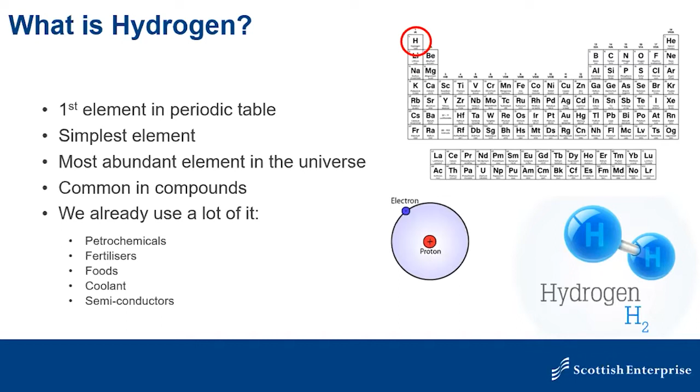So what is hydrogen? Here you have a bit of background information: it's the first element in the periodic table. Hydrogen exists in abundance in the sun, but is hardly present at all in our atmosphere, so it has to be made from molecules that contain it, such as water and organic compounds.

How do you produce it? Well, there's various different ways and all different kinds of colors. I'm only going to talk about blue and green hydrogen because they're the ones that the Scottish Government is supporting. Steam methane reforming is the way we make blue hydrogen. It's a method of producing hydrogen from natural gas, which is mostly methane, and it's currently the cheapest source of industrial hydrogen. Green hydrogen is made through electrolysis, using electricity to split water into hydrogen and oxygen.

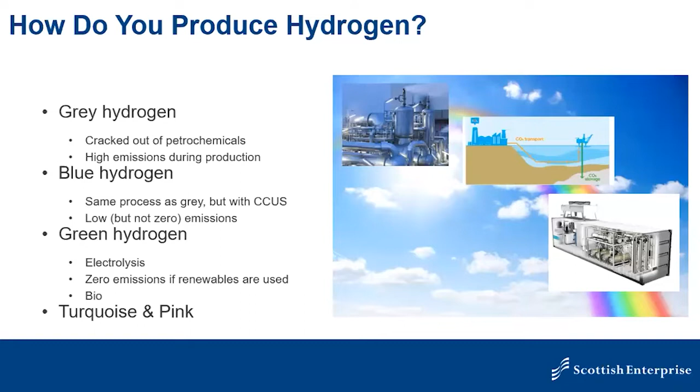Scotland has the potential to produce industrial scale quantities, firstly of blue hydrogen via steam methane reforming, and then green hydrogen from our offshore and onshore wind and other renewables.

So why hydrogen? Well, I think you're all aware that Scotland has really stretching climate change targets. We need to act rapidly and at scale in an unprecedented way across our innovation, across our investment, across regulation to make this happen. The Scottish Government is also committed to not leaving anybody behind, so is applying a just transition approach to this, and we see it as a really big economic opportunity.

We think that hydrogen can help, and the reason for this - I'm going to show very briefly on my next slide - is that it has so many different ways of being used. It has high energy content by mass. It's very flexible and can be applied to heat in domestic, commercial, industrial cases, and transport and power. And it's also zero emissions at the point of delivery.

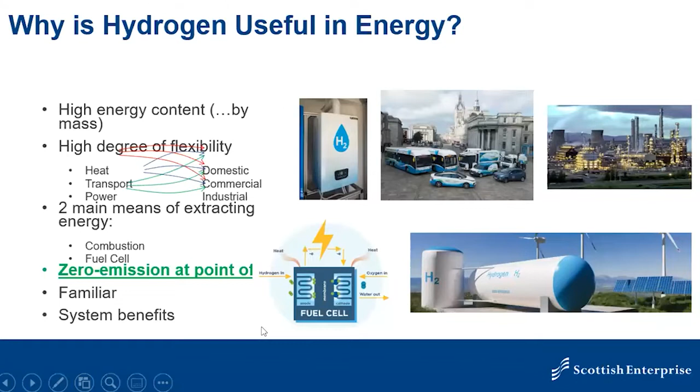It's familiar because it can be used in a very similar way to the way gas can be used within the heating system, and there are system-wide benefits that don't always get picked up in cost comparisons. So why Scotland? Well, past projects, I'll talk about those in a minute.

Natural resources we have in abundance: wind, wave and tidal. Infrastructure legacy of the oil and gas industry, our pipes and storage space. And our innovation—we have centres of excellence across the country.

Supply chain, just as I said, we have the infrastructure legacy from oil and gas. We also have a strong engineering tradition, and we have plentiful supply chain opportunities that could be transferred from the oil and gas sector into this one.

Through our analysis we've looked at export, and we think this can be a major economic development opportunity for Scotland, creating between 70 and 300,000 jobs by 2045, depending on the degree of intervention and how far we go down the hydrogen route—from incremental change to perhaps exporting on a vast scale.

And we have a project pipeline—there are a lot of projects around Scotland. Historically, these are the projects that really have put Scotland on the hydrogen map internationally. Without these projects, many of them very first-of-a-kind demonstrators, we would not be able to demonstrate and commercialise energy production and supply at scale. Scotland will not unlock its potential without these projects, nor will it attract supply chain transition and investment. So it's really important that we continue to develop these projects and scale them up over the next few years.

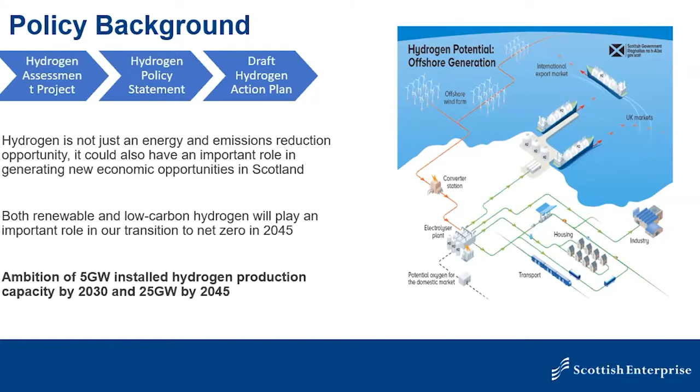Bit of policy background very quickly: the Scottish Government produced its hydrogen policy a year ago, followed up by the Hydrogen Action Plan. The big thing here is the level of ambition—5 gigawatts to be installed by 2030 and 25 gigawatts by 2045. That's enormous. The Hydrogen Action Plan has 37 actions in it.

I'm not going to go into all of those. One key area of interest to us as an organisation is the regional hydrogen energy hubs being described—region, city, island, industrial clusters that host the entire value chain. These are where we see really strong economic opportunities as well, and there are several of these around the country at different stages of development, happening all over the country.

Here's a few examples—I can't go into detail given the time, but I want to give you a flavour of the types of projects. We've got Whitelee Wind Farm, which will have the UK's largest electrolyser at 20 megawatts. It's in planning at Whitelee Wind Farm, driven by Scottish Power along with ITM and BOC, and they plan to generate up to 8 tons of green hydrogen per day from 2023. This project is looking for local demand, transport or industry.

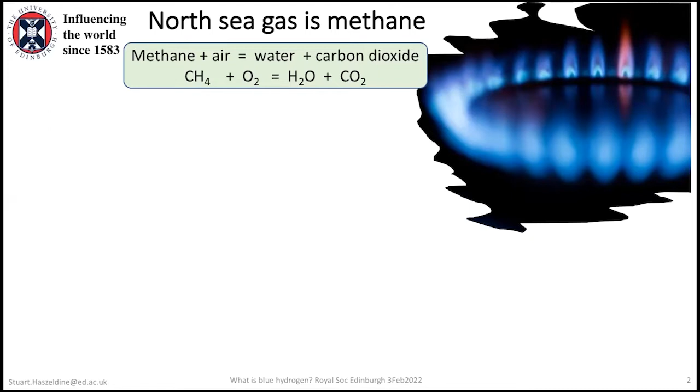So when we burn methane in air, which is oxygen, we produce water and carbon dioxide. And it's that carbon dioxide which Scotland, the UK, and many countries worldwide are now committed to reducing to net zero emissions, and in Scotland's case by 2045. So that means we have to get rid of this emission of carbon dioxide, so we have to stop burning the methane.

So the point about switching from methane to hydrogen is that by switching to a fuel with no carbon, that removes those carbon dioxide emissions. Veronica mentioned there are many different types of hydrogen.

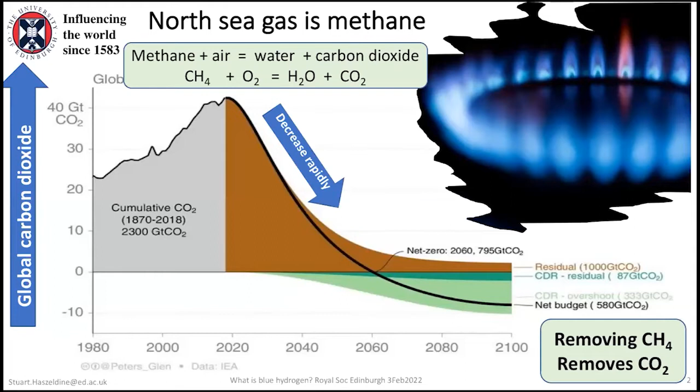They're given colors just to make them easy to understand, but the colors only tell part of the story - they tell you where the hydrogen has come from. We can make hydrogen from methane or from coal. That's commonly practiced around the world, but it's terrible for the environment because all the carbon in the methane or coal is emitted and dumped into the atmosphere. So worldwide, in terms of the greenhouse effect, we're no better off.

What we're talking about as the first step for Scotland is making blue hydrogen, which is still taking methane - in our case, natural North Sea gas or imported Norwegian gas - and turning that methane into hydrogen, splitting it into carbon and hydrogen, but storing the carbon dioxide deep below ground beneath the North Sea. Rebecca will talk about that in the next presentation.

You can also make so-called pink hydrogen using nuclear power to provide the heat, but we're not talking about that today. And of course, we can make green hydrogen, the ultimate goal: using so much zero-carbon electricity that we can pass an electric current through water and split it into hydrogen and oxygen. That's the hydrogen we'll be using in the long term - the product from all those wind farms. But the first step, the easiest and quickest available, is making blue hydrogen.

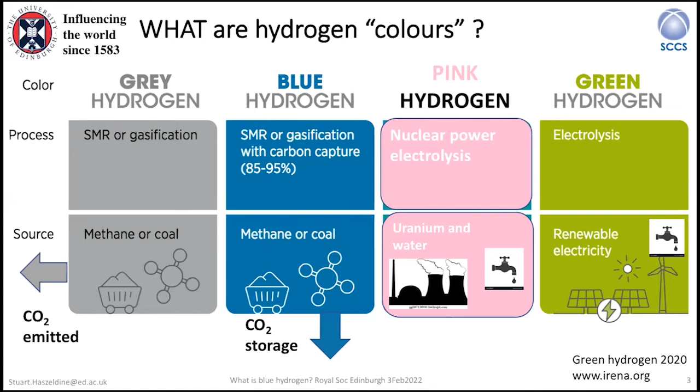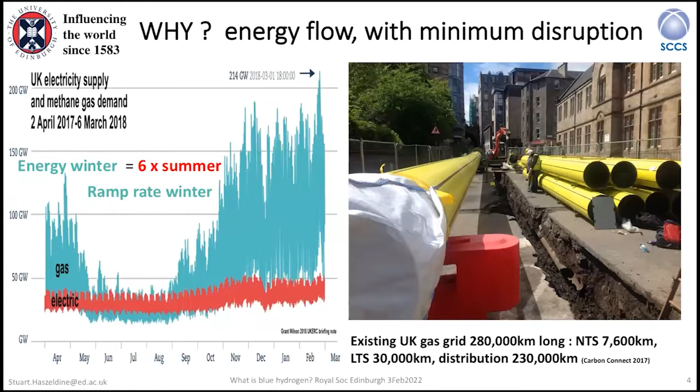And we can convert those to hydrogen transport really quite easily and save ourselves literally billions of pounds by using that gas grid. The other thing about hydrogen is it's really very good for storing.

And that means we can have a constant, very secure supply of hydrogen throughout the year and from year to year. So how will this look in your house? Well, a lot of older people like me can remember vaguely when the whole country used to run off town gas, hydrogen and carbon monoxide, and we converted to North Sea gas. That took about 10 years to change all the systems in our boilers and on our cookers.

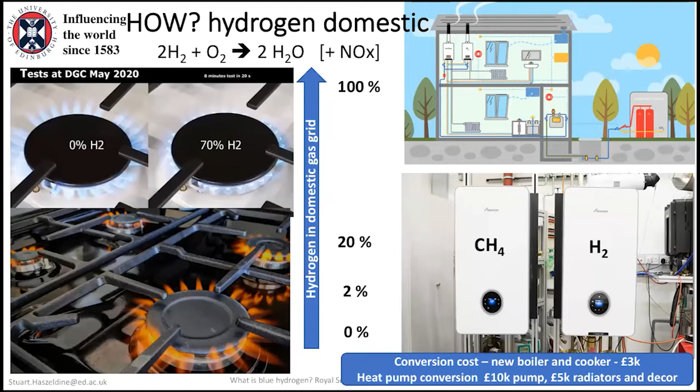Part of the point here is converting a house to hydrogen involves maybe a new boiler and a new cooker, maybe £3,000, whereas converting a house to electric heating with a heat pump and changing a lot of the radiators to make them larger can be significantly more expensive. So hydrogen conversion could look like being quick and quite low cost as well.

And does this exist in the UK? Yes. Veronica talked about how there are plans around Scotland to generate hydrogen from wind. There are also very big plans in England to generate blue hydrogen from methane gas. Here's one of those from BP, British Petroleum, to bring methane gas in from the offshore fields or from Norway.

Which is a near to zero emissions transport system, put that through a fabrication plant, a big chemical works, to split that methane into carbon dioxide, which will be stored underground, and hydrogen, which gets sent through the pipe network, which we can use in our cities and towns.

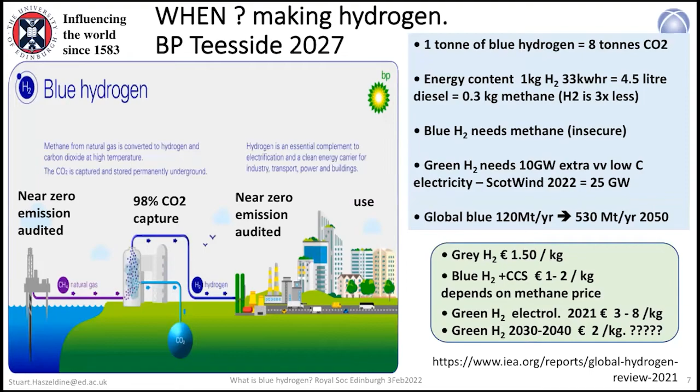And here on the right, I've tabulated some information which the fast readers may have read, but basically it says there's a lot of equivalence between hydrogen and what we're used to as methane. We maybe need to use 2 or 3 times more volume of hydrogen to get the same energy, but it's a gas with basically very similar properties, which we can flow through our transport system. It will be more expensive, but similar in cost to what we're paying for expensive gas right now, or what we were paying for electricity maybe 3 or 5 months ago. So the cost is comparable, and remember, the conversion cost also benefits from using the existing pipe system.

So that's what I've got to say, and hand back to Melfort to introduce the next speaker. Stuart, thank you.

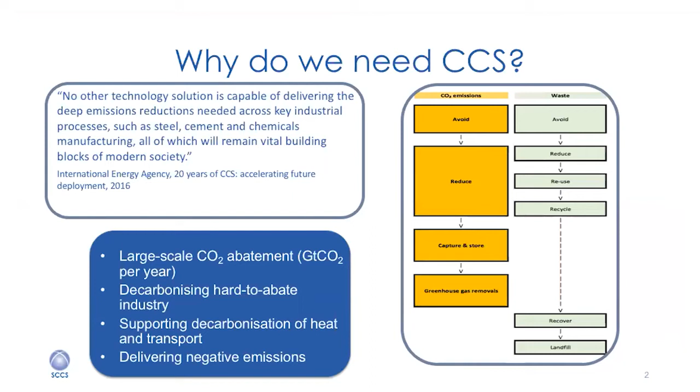CCS has got three main stages. Stage one, capture the carbon dioxide. Stage two, transport it to where it needs to be. Stage three, store it permanently and securely. I'm going to deal with the stages in that order.

Firstly, CO2 capture. As Stuart alluded to in his presentation, carbon dioxide is a waste product from the process of making hydrogen from methane. It's also a waste product from a lot of other industries — either industries with a high need for fossil fuels to heat, such as glass, or industries that produce carbon dioxide as part of the process, such as cement. Things like steel and cement, both of which have high carbon dioxide emissions, are also crucial for most of the things we need in life, and particularly for generating renewable power.

So CCS not only helps decarbonize hydrogen from methane, it also helps decarbonize green hydrogen as well over the life cycle. The other thing listed in green here is where you burn or otherwise produce carbon dioxide from a biogenic source, such as through fermentation or processing of sewage or wastewater, that tends not to get counted in the accountings. That means if you can capture and store that CO2, then that's not so much emissions reduction as an emissions removal, or what we call negative emissions. So basically having CCS in place opens up a lot of possibilities beyond just the hydrogen thing.

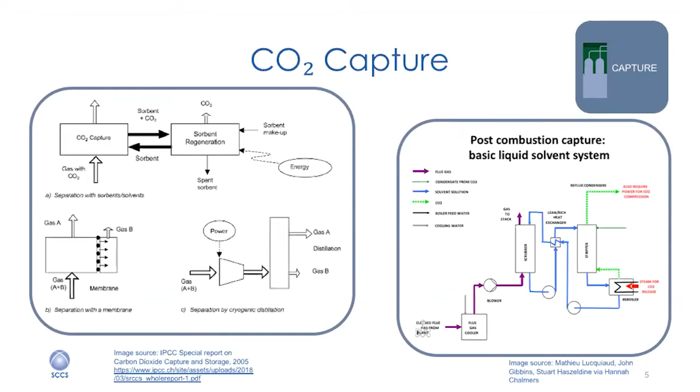Once you've captured your carbon dioxide, you need to transport it, because the storage sites for CO2 are offshore, and most of the emitters are onshore. I think it's about 25% of Scotland's emissions come out of just Grangemouth and around the central belt. So you've got these real concentrations, but they're far from each other.

The reason you might want to do that is because of where the CO2 storage is. Scotland, as part of the UK, has about 40 to 50% of the known CO2 storage capacity in Europe. So there's a real opportunity to use that capacity to store other countries' captured CO2, not just our own. We've got about 5.7 gigatons of storage at the absolute minimum estimate, which is about 150 years of Scotland's emissions. So there's plenty of opportunity to store CO2.

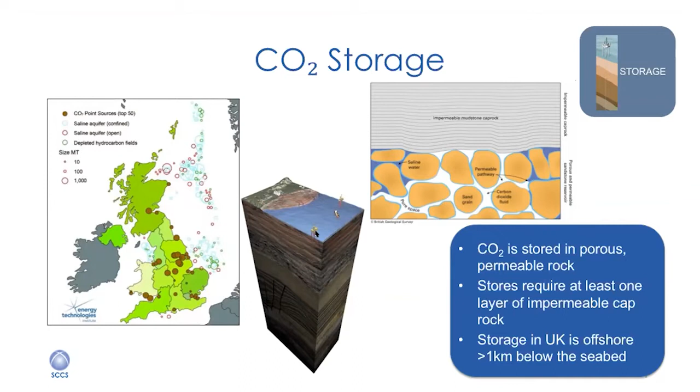This map on the left shows some of the potential CO2 storage sites in UK waters. As I said, there's an opportunity not just to store our own emissions, but to store other people's too. And that is the end of my tour. Hopefully that gives you a bit of an introduction. If you want to learn more, we've got a massive open online course on CCS, or of course just get in touch with me. Thanks.

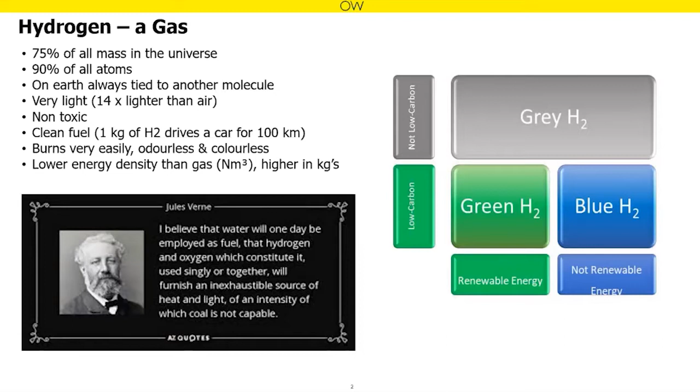In terms of what we're looking at going forward, at a government level the EU has put a huge onus on renewable hydrogen. Its priority is green hydrogen, and although it still sees a transition role for blue hydrogen, it's looking at having 40 gigawatts of electrolyzers installed by 2030. It's committed 180 billion euros to hydrogen production, with a further 120 billion to be invested in hydrogen transport and storage.

It also sees the existing gas network as a crucial asset in doing this. As mentioned earlier by Stuart, we've already got a network in the UK that is ready for this, as it's being converted from steel to polymer.

The UK set a net zero target by 2050, and Scotland set its target to 2045, one step ahead. Kwasi Kwarteng said hydrogen offers the opportunity of a cleaner, greener fuel for heating our homes and getting us from A to B.

In the context of what that means for Scotland, the Scottish Energy Strategy was published in 2017. In March 2019, it was followed by the Scottish Government's Electricity and Gas Network Vision. In September 2019, a hydrogen assessment project was announced, along with the government's commitment to the 2045 net zero goal. In December 2020, that project delivered a policy statement of 5 gigawatts of renewable and low carbon hydrogen by 2030.

We've already heard a little about blue hydrogen, but if we focus on splitting water with renewable power, we see this as a significant opportunity, which is what we're currently assessing. This provides fuel, energy storage, and fuel for industry as well. There are lots of challenges in how we do this, but also lots of opportunities.

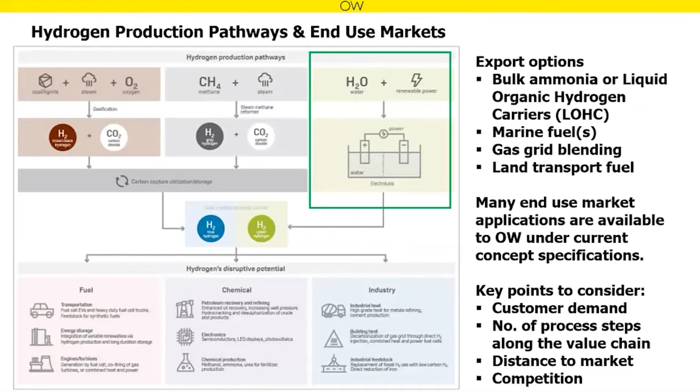Some key points here: it's a bit of a chicken and egg scenario in terms of creating consumer demand versus what's available on the market. There are a number of steps along the value chain in how we do this, including distance to market, as highlighted in these graphs. If we're looking at a market in Europe while producing in the UK, how do we transport it? That ties to the top bullet point, and then there's ultimately the competition.

If we look at what was recently announced in Scotland as part of the ScotWind announcement, 25 gigawatts overall, our company Ocean Winds was successful in this site, adjacent to our Moray East and Moray West offshore wind developments. We're committed to looking at the development opportunity of producing hydrogen from that field as well.

At the moment, there's still a lot of technical analysis to go into exactly the optimal solution for that, because there's the opportunity to produce it offshore and then export it onshore, or take the power onshore and produce it there. So these are the kinds of things we're evaluating.

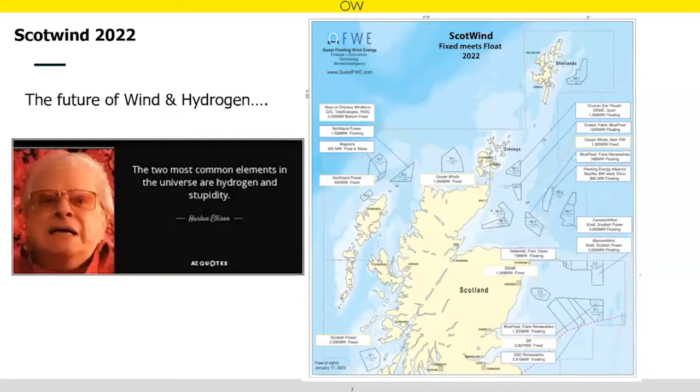One quote I quite like is: the two most common elements of the universe are hydrogen and stupidity. So either everyone has got this wrong and we're all being crazily stupid about it, or we've got it right and we're doing something that will fundamentally impact how we live our lives in the future.

Some of the projects doing this include Dolphyn, which Ocean Winds as a company is involved in through our sub-entities Principle Power and ENGIE Tractebel, who are supporting the design work of this technology. I have to compliment ERM on a great job developing this, and this will hopefully tie into Aberdeen in the future.